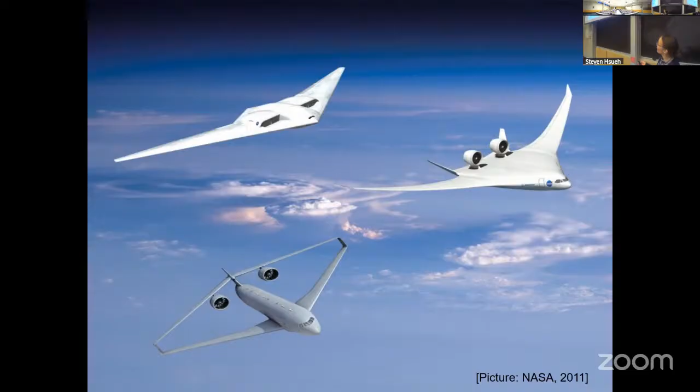And so I will start just with looking at some pictures here. And the question that I would try to answer today is, what does a truly sustainable aircraft of the future look like? And how do we make it work? Okay. So the picture that we're looking at here depicts some beautiful futuristic concepts. And what is interesting about this picture is that these are actually the airplanes that NASA has foreseen that we're going to be flying since last year.

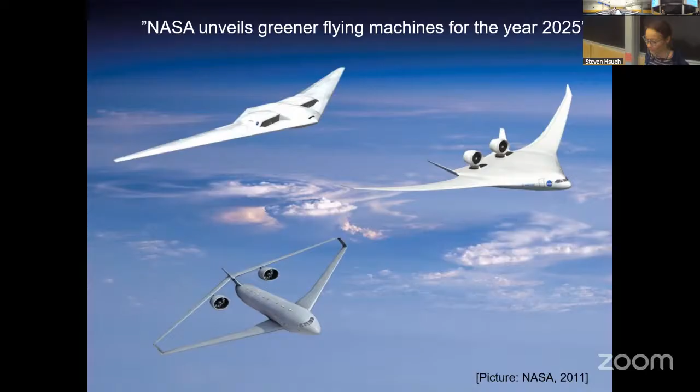So I think most of you, if you have taken the aircraft recently, it looked rather like this at the Montreal airport. So this is one of the greatest and latest airplanes that entered service a couple of years ago, designed by Bombardier initially, now called the Airbus A220, and it really looks pretty much the same. Oh? It doesn't look like this at all. So the question that I want to explore a little bit this evening is, what are the barriers to making these beautiful, very efficient concepts work, and what are the challenges we have? Okay.

So my flight plan for this talk, I always have a flight plan as every aerospace engineer. We're going to start with a little introduction talking about these challenges. And also because I think most of you are not necessarily in the field of aerospace engineering, maybe more in physics, as I suppose, I will bring you up to speed about some of the things that I work on in aerospace engineering, which are very applied physics.

And then once we have the necessary knowledge, we're going to look into two case studies that highlight some of the research advances that we worked on, and that will maybe help us to accelerate a little bit the maturation of these advanced concepts. And then at the end, I'm going to talk about what's next, what's coming up. So why do we need to rethink the aircraft that we are all flying in today? And what is the driver for that? So, slides.

Good. A lot of the drivers today are regulations regarding reducing emissions and the environmental impact of aircraft. This has been around for a long time, so people try to investigate solutions to reduce the environmental impact of aircraft, mainly emissions: pollution of the air, but also emissions in terms of noise.

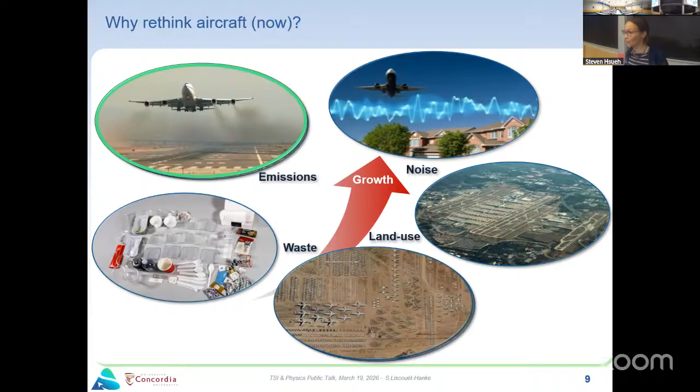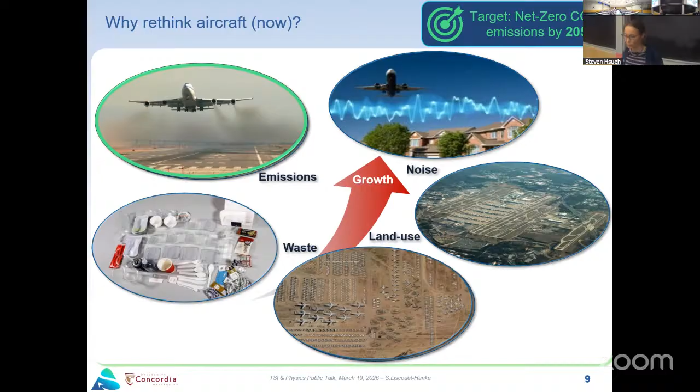But there is a renewed interest, and there are always targets to reduce the environmental impact of aircraft and aviation, and that drives a lot of the advanced design activities. Just recently, the targets have been renewed, and now we're targeting net zero CO2 emission by 2050. This is very ambitious, but that's also what makes us work and think about it every day. So what are the different aviation solutions we imagine to meet these targets?

There's a mix of things. As I already talked about, here at the top left, people think a lot about alternative fuels, sustainable aviation fuels, for example. But more recently, people talk a lot about hydrogen propulsion. This is a concept from Airbus showing an aircraft with hydrogen tanks. This is also not new. People worked on hydrogen-powered aircraft a long time ago. I think in the 70s there was even a demonstrator flying, developed by Airbus in Germany together with a Russian company. So this is not a new concept, but recently, with this pressure about reducing emissions, hydrogen is again an option on the table.

Then we have many investigations in what we call hybrid electric aircraft and aircraft with distributed propulsion. Here you see two examples on the top. This is a Canadian project with Pratt & Whitney and others looking at making a hybrid electric version of the Q400, which is a very popular Canadian airplane. And below you see a more advanced concept from a company from the Netherlands, Elysian Aircraft, with distributed propellers at the wing, all driven by electrical power.

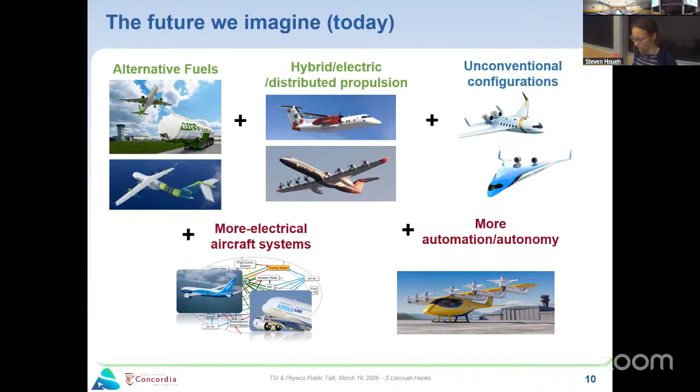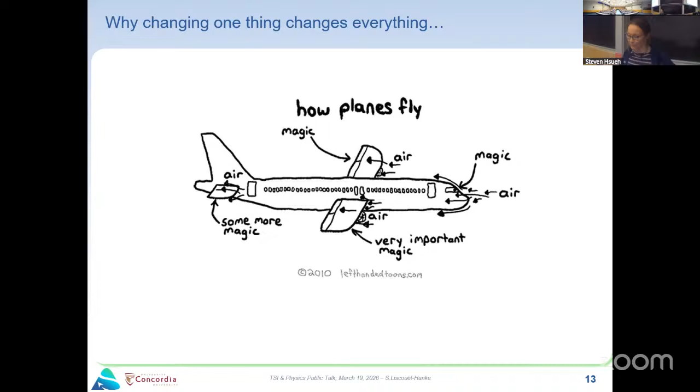But first, I just want to give you some background about why it is so complicated. As physicists, most of you know how airplanes fly. There is a lot of magic involved in what's happening with the airflow around the surfaces and so on. But for sure, what we need to consider is the force balance on our airplane. Whether it looks conventional or unconventional, we need to respect the physics.

Typically, in order to bring our airplane into the air, we need to generate lift. We generate the lift by moving the aircraft forward through the airstream by producing thrust. So if we move fast, we have more lift. And if the aerodynamics engineer worked very well, we have a very good aerodynamic shape of the aircraft, and we can generate a lot of lift.

So thrust is generated by the engines, and it's also there to overcome the resistance of the aircraft in the air, which we call the drag. And of course, our lift needs to be big enough to overcome the weight of our whole machine that carries all the necessary equipment that we need to make our aircraft fly.

So if we now want to modify the aircraft, most of these advanced concepts that you have seen at the beginning are concerned about the aerodynamic efficiency. So these beautiful concepts try to optimize the lift to drag ratio. Most of the time, we want to create more lift with the overall surface and reduce the drag. And so in this case, if you do that, you might need a little bit less thrust to fly at the same speed. Yeah, so that's the premise.

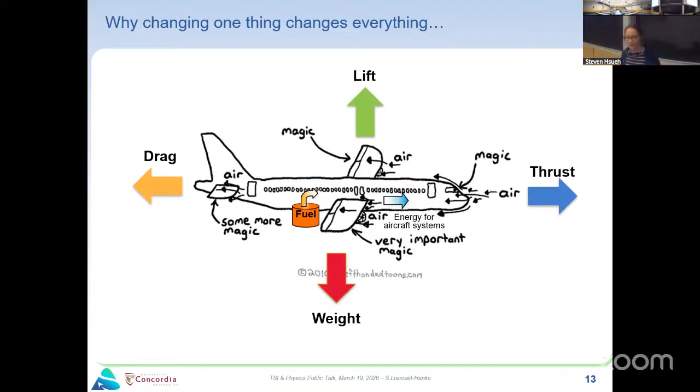Okay, so we burn fuel to propel our airplane forward. We also need some energy for all the systems inside the aircraft that we need to make work, and this is what I'm going to delve a little bit deeper into in a few minutes. And also we take some energy from the outside. So typically we need to do some cooling inside the aircraft. For example, if we have a more electric propulsion, it needs a lot of cooling. So we put some holes in our beautiful aerodynamic shape to get some cold air from the outside, and this again increases our drag. And of course, we're going to exhaust some stuff to the environment.

So just to say, what is really important when we talk about an airplane is that it's typically what we call a flying compromise. Okay, so we can improve the lift of our aircraft, but then we might, for example, end up with a very heavy structure that is very difficult to design or costs a lot. And also it could be heavier, and then we need again more thrust. So every time we need to make a change on our airplane, we need to consider all these aspects together.

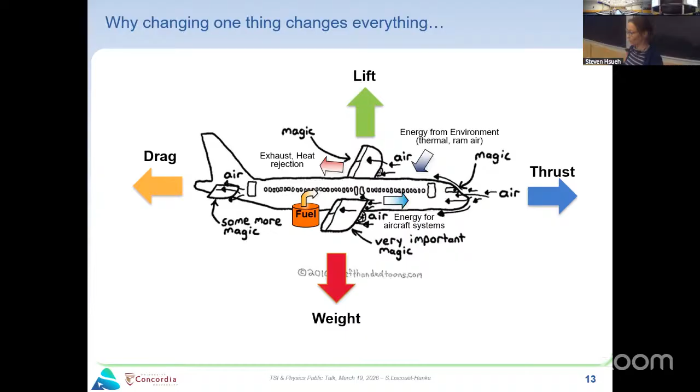Yes. And so typically when you look at these beautiful advanced concepts, they are more concerned about the aerodynamics and the propulsion systems. One of the things that is typically a little bit less investigated is everything that we need to put below the structure and the beautiful skin to make our aircraft work. And this is what I want to talk a little bit more about, because this is what typically makes the aircraft development process very lengthy and very complicated.

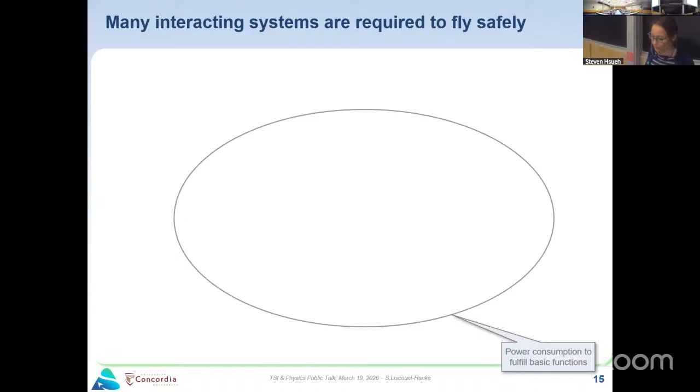So now I'm going to talk a little bit more about all these systems that we need to fly safely. And why I'm going to talk about it: because this is really important to understand, because this will make our new aircraft concept work or not work. So typically in an aircraft, we have different systems, as I said, and we can classify them in different categories. The first are the systems that fulfill the basic functions of our aircraft, and they consume some sort of power.

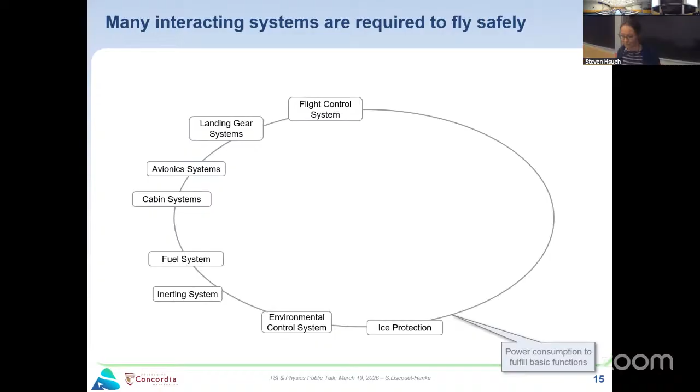So for example, the flight control system will move little surfaces on the wing to control the direction of the aircraft. We have the landing gear systems to safely land. We have the avionics, as I said, to navigate, systems in the cabin to control the environment, the temperature, the pressure, to make sure we survive when we fly up there. We have the fuel system to distribute the fuel to the engines, environmental control I talked about, and ice protection as well. So this is just a few of them that are typically in an aircraft that we use to travel around.

In order to make those work, we need different power systems. So typically we have hydraulic systems, electric systems, and pneumatic systems, and they receive power from the aircraft engine. We typically have an additional system, which is called the auxiliary power unit, which is used on the ground or in failure scenarios. And we always have our last emergency power device, the ram air turbine, that makes us land safely even if the engines fail.

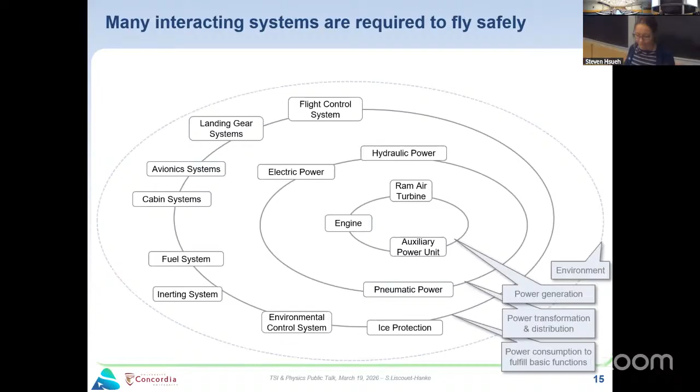So typically, just to give you an idea on how this whole works, we have the fuel system that will provide some fuel to the engines, and the engines provide thrust for our aircraft to advance, but also provide some mechanical power to drive an electric generator, hydraulic pump, and they provide some compressed air to our pneumatic system. The hydraulic system then will deliver power to actuation systems like the flight control and the landing gear, the electric system to avionics, cabin, etc., fuel pumps, and we have some systems that run on pneumatic power.

So on the ground, as I said, we're going to use the APU as well. It also uses fuel, and the APU will be used to power some systems on the ground. We also use it to start the engine. And if you want to start it, you will use electric power. So you're going to see this will become even more complicated.

We have some emergency power supply, and we typically use the air from the outside for some cooling and other functions. And this is important to consider because this is what creates the drag on our airplane. And if we need more of that, because we need to cool more because we have an electric propulsion system, then this is important not to forget.

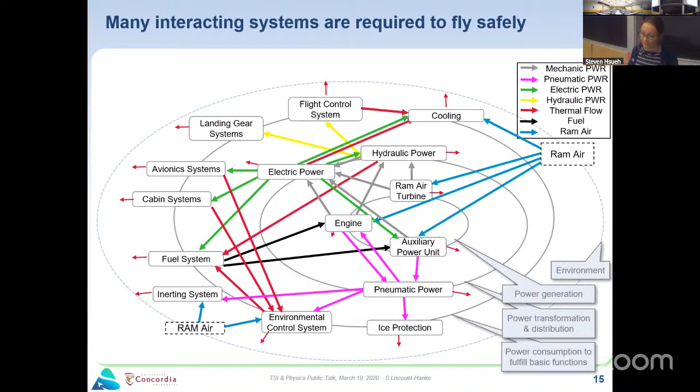So each of the systems generates some heat that goes to the environment or needs to be cooled by the systems inside the aircraft. And sometimes we have so much heat that we need a dedicated cooling system. And recently, most of these aircraft systems are getting more and more electric, so all of them use a little bit more or less of electric power. In future configurations, we might use a fuel cell as a power device, with some alternative fuel and so on.

So this is just to illustrate that there's a lot of complexity going on under the skin of the aircraft. And if the conceptual designer and the aerodynamics people come up and say, oh, we have this beautiful new concept and it looks nice, as a system engineer, my first question is, okay, how can we get all this stuff in the aircraft? How can we make it work?

You have to consider that about 30 to 40% of the volume inside the aircraft is filled with this equipment. We need it to make the aircraft work safely. We cannot just minimize it and fit it in some aerodynamic shape. So this is why it's important to have some consideration of that.

And this is also the reason why a lot of the advanced concept projects, after this initial concept phase, when you start looking into that, either they get delayed or they say, oh, we are not there yet, we go back to the drawing board, and this is when these development cycles become very long.

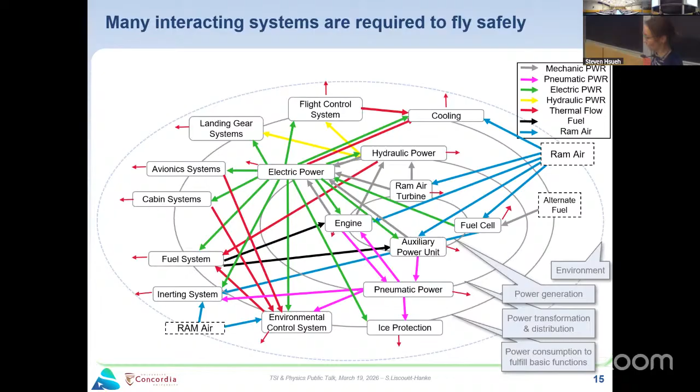All right, talking a little bit about that, and then I'm done with the introduction. How many of you know how much time it takes to develop a new aircraft from scratch? Any idea? 10 years. That's a pretty good guess. Okay, this is when everything goes well, I would say. The thing is, there's a hidden part about aircraft development, when people in secrecy look at all these advanced concepts. But typically, we have 3 major phases in the development process.

Conceptual design, this is where we develop the concept. Preliminary design, and this is where traditionally we start to look at all these complexities. And in the detailed design, we just build it, and then we hope it works in our first flight. Typically, it's a year at least until we get the certification. So that means we can say this aircraft is safe, and then afterwards we can enter into service. So this is typically a very long process.

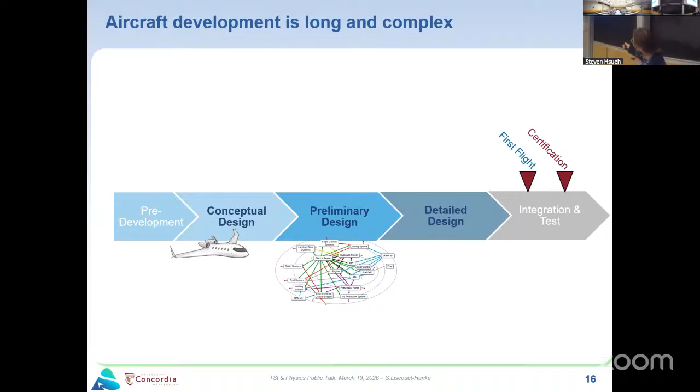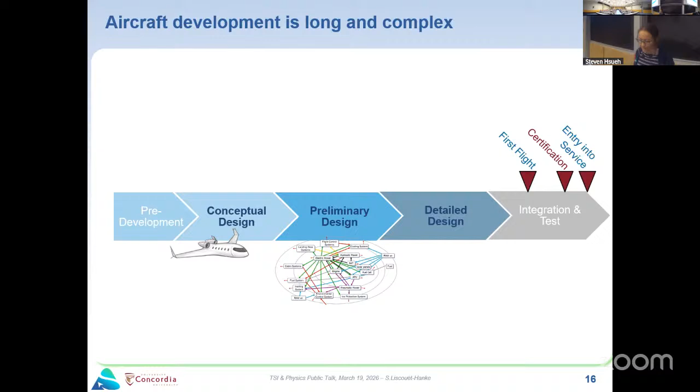And a lot of these advanced concepts, they kind of get, I would say, stalled in this transition from conceptual to the preliminary design. Somewhere in between, there is what we call the launch of the project. This is where the public will get to know about it. But sometimes you spend already many years here just ahead of time.

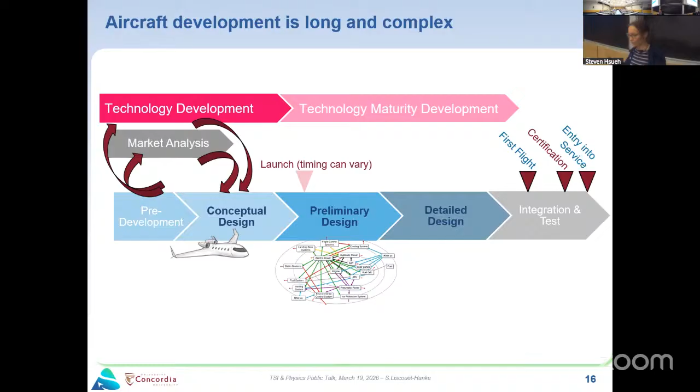So typically, in parallel to designing new airplanes, this is the game of the aircraft manufacturer. There's many different companies and universities developing technologies that we eventually can use, and their market analysis and all that need to work out together in the beginning to say, okay, this aircraft might make sense, it's worth investing a lot of money to develop it.

And so because of a lot of these very promising concepts that we have seen that promise a reduction of fuel burn of 50% or something that look very interesting, because they typically either get even heavier or unfeasible when we go into these detailed phases, this is why we try to put some of the system details in the earlier design phases.

So this is basically what we call system architecting, and this is what I'm looking at in my research program: to not be the person that says, oh, it doesn't work, but to develop tools and processes that we can use early on to develop concepts that work and that will actually make aircraft more sustainable.

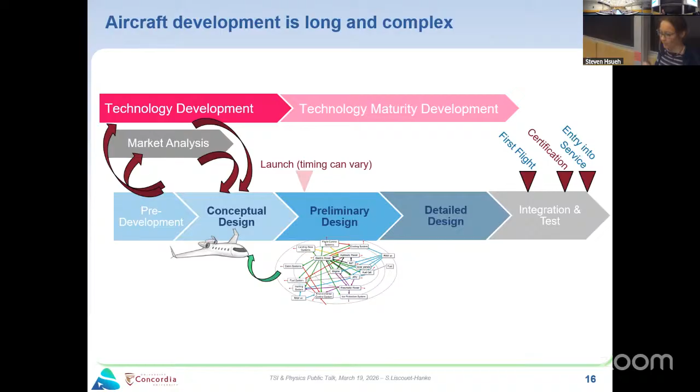So in order to do that, there's a couple of research axes. I will not go through all the details, but basically we're looking into different process improvements, developing models and tools, and also investigating some new technologies that could work together. And we do many different application studies on advanced concepts, and I'm gonna talk about this flying V concept here a little bit today, but it goes beyond airplanes, maybe even space in the future.

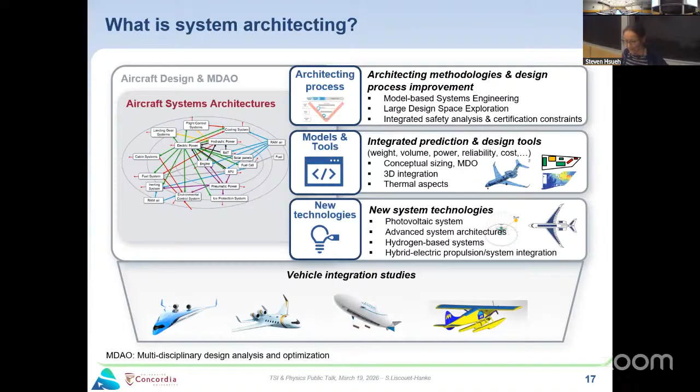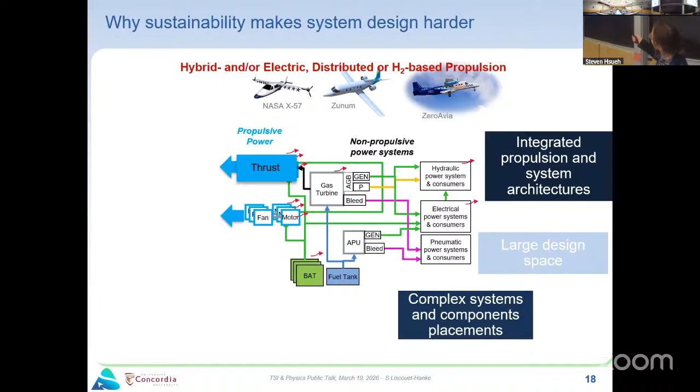Okay, so what makes the sustainable design even harder, as I said, is that there are many aspects, many things change. First of all, we're gonna have more integration between our propulsion system and our system architecture. We're gonna have many different options that we can investigate, so it's harder to choose the best solution. We're gonna have complex systems, and because the shape of the aircraft changes, it's more complicated to place them in the aircraft. We're gonna have high power, high voltage, and safety certification challenges, and more thermal management problems.

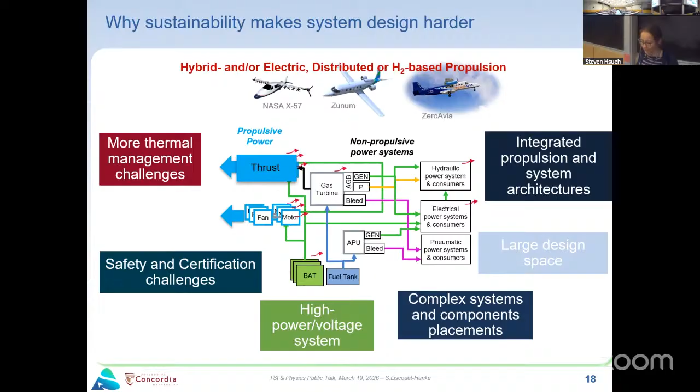So I will talk about only a few of them today, maybe the last two ones. But that was just to put you into context about the rest of the talk. So I think what we have learned so far is that these new aircraft concepts and new propulsion systems seem very promising, but they create more challenges in the system development, especially complexity and also new safety questions. And this is the first thing that I'm gonna address in the first case study that I'm gonna present.

All right, so we're gonna talk about the so-called flying V aircraft. This is a very innovative project that has been developed by the TU Delft in the Netherlands. The first concept was proposed in 2014, so it's already a couple of years. And there's a lot of different research activities going on, especially in optimizing the aerodynamics and the stability and control.

So this aircraft has many challenges, but the premise is that it can reduce the fuel burn by 20%, at least compared to a comparable aircraft, because it has a very integrated design. If you look at the inside, the cabin is integrated into the wings, so we don't really have a fuselage per se. The whole shape is aerodynamic, and it's a very efficient use of space.

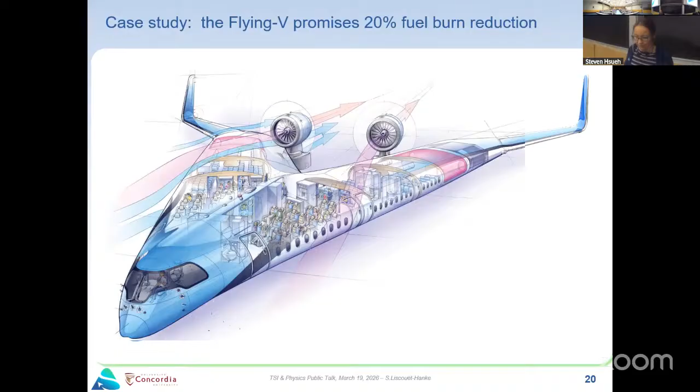So now let's have a look at the systems aspect for this aircraft. We're going to compare it to a conventional one here. This aircraft is sized in terms of performance and passengers as the Airbus A350, which is a large aircraft that you would typically use if you fly across the ocean. And the first thing we can notice is that, yes, we have a different shape of the fuselage and the wing. Overall, we use less area, which is why it's so advantageous from an aerodynamic perspective, but we also have a very different cross-section of the cabin.

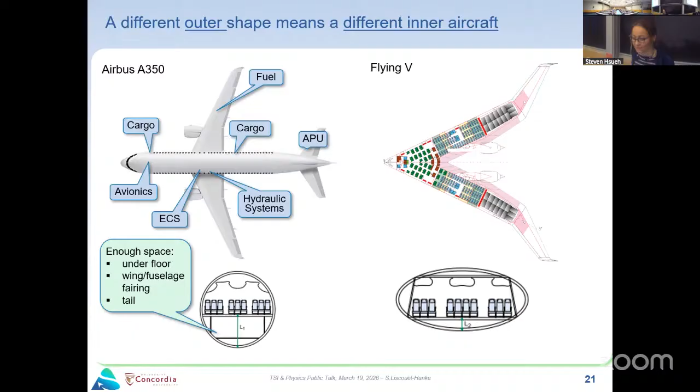Okay? So typically, we store all the fuel for the aircraft in the wings. And we have some space for cargo and avionics underfloor in the nose and aft areas. The hydraulic systems and air conditioning are typically somewhere in the zone under the floor. And we have a tail here for the APU. So typically we have enough space under the floor, in the wings, in the wing fuselage section and the tail to put everything we need.

When we looked at this airplane here, the designers had already foreseen some space for cargo here in the back. So this is good. The fuel is a little bit more difficult. You see all these pink areas are designated for the fuel, which means if you're sitting in this part of the fuselage here, there will actually be fuel on the side. So you cannot look out of the window and say hello to the neighbor sitting over there, which would be really fun. You will just be looking through a fuel tank.

There's limited space below the floor, as you can see here, very small. So no space really to locate any air inlets, air conditioning system, hydraulic bays, etc. So that's the first thing. There's not much space, so the outer shape has a big impact on the inner space. So we looked at that and see, okay, how can we find solutions to make it work?

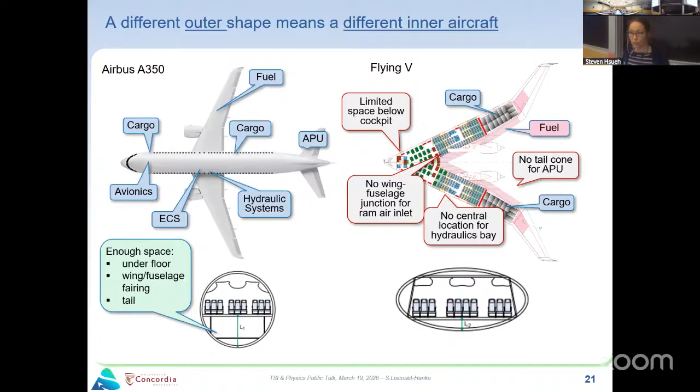There's also no tail cone for an APU. So one of the things that drives the system layout as well is the safety. So each aircraft needs to withstand a certain number of threats. And for safety, there are different analyses that are done. And typically, one of the analyses is to look at the survivability of the aircraft under the different threats.

So for example, a bird strike, lightning strike, fire, ice, and also release of fragments, for example, from the engine or from the tires that could impact the aircraft and hit some components. So these analyses, we call it particular risk analysis, guide the layout of the systems and components.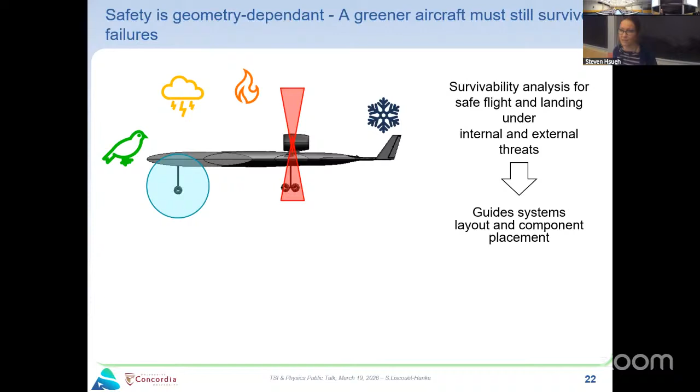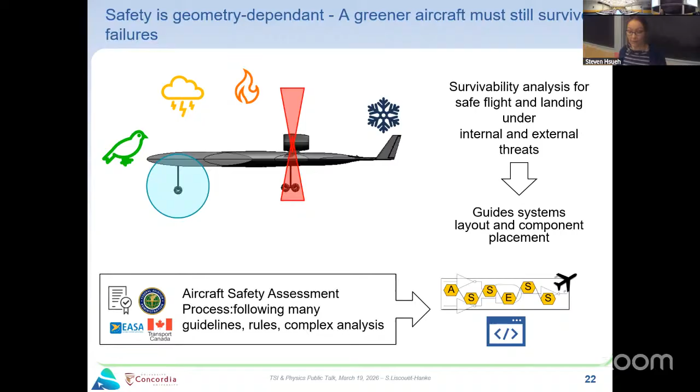And because there are so many rules and regulations, and it's difficult to do that quickly in conceptual design, we computerized all these methods in a code that can run very quickly, and we can use that in conceptual design on a very simplified aircraft shape, as you will see here, which will allow us to make a quick analysis early on. And so I will just show one aspect of that.

So one of these analyses is what we call the engine rotor failure. So a little fragment of our engine gets loose and with infinite energy will hit on a trajectory through the aircraft. The trajectories are these red cones that you see here. And you see on a conventional aircraft, you should not sit between the engines. This is the first thing, but typically from one engine to the other, there's the fuselage in between and so on. So there are some elements that will absorb some of this energy.

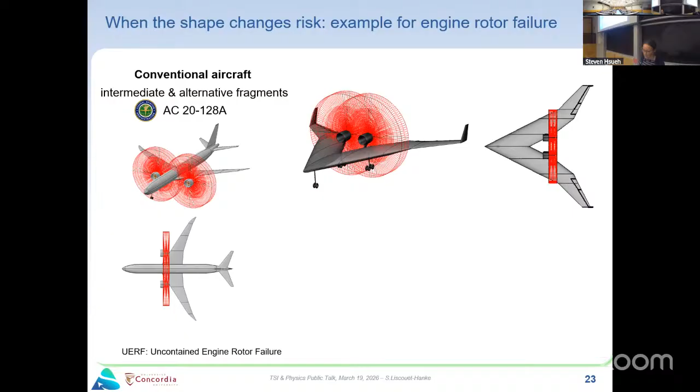If you look at our Flying V aircraft, we see already that between the engines, there's nothing in between. So typically if a blade of this engine gets loose, it will most probably hit the other engine. So both of them will fail right away if you don't put something in place, and this is not good, okay? So there are many other issues we discovered through doing these different analyses, but this is one of them.

So we can have potentially loss of thrust. We can make a hole in our cabin, so we lose the cabin pressure. And also the routing of a lot of the systems that go through these different areas, it will be difficult to separate that and so on.

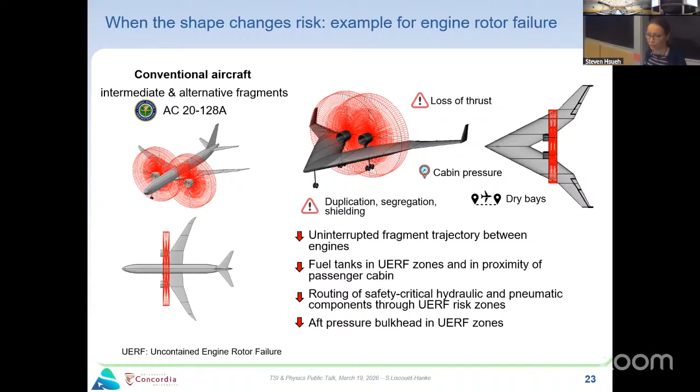So this initial analysis already showed us many challenges, and this was very interesting for the researchers on the Flying V. So they were discussing some solutions. They are not disclosed yet, but it's just very interesting that you can use this kind of very fast analysis, and you can actually combine that in the future with an aerodynamic optimization to already get a better configuration from the beginning.

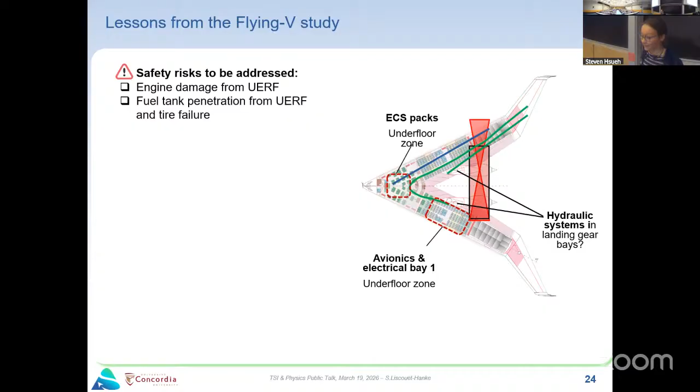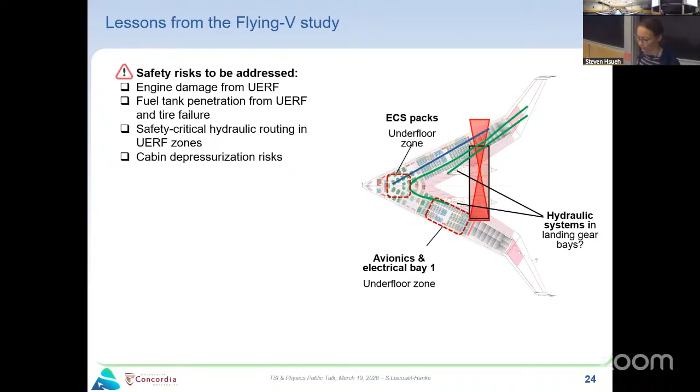So just some lessons from this study here: there are some safety risks that need to be addressed for the engines, for the fuel tank placement, for the routing of the hydraulic system, and protection for cabin depressurization. So the conclusion is our conceptual design tools help. And there's more work for the integration of the systems, the distribution of the avionics. Potentially, there's a lot of maintenance complexity that needs to be addressed, routing of systems, etc. So there's more work required.

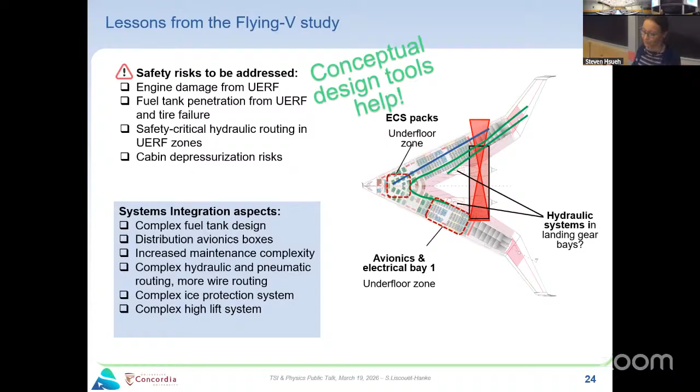But this was just an illustration of how automating all these complicated rules that are in thousands of lines of regulations, putting them into a code, enables us to use them in early design. And so we can spot some problems early on and then act on them and actually maybe develop a solution that will work in the future.

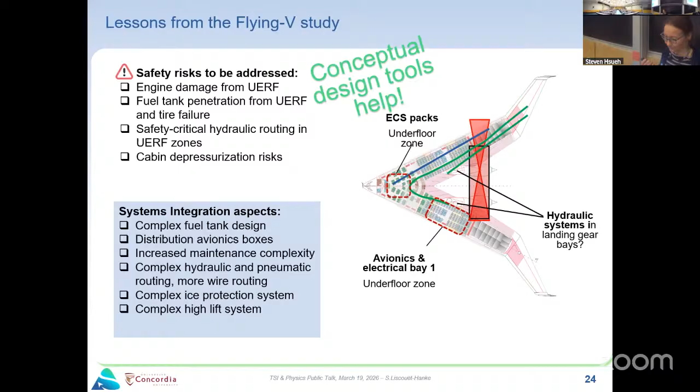All right, so now we have all these systems placed in the aircraft. Another aspect that is typically very critical early on, especially if you go to electrified aircraft, are thermal systems. So we can put all the systems in, then typically they are tightly packed, and then we're gonna have problems because they overheat. So then there's two options typically. Either we go back to our aerodynamics colleague and put some holes in our beautifully designed shape, or we try to address that earlier on by maybe finding another solution.

So the second part of the second case study I'm going to show you is that we try to address these hidden thermal challenges that we also typically find out only in the later design stages. How can we address them also earlier? Very similar to our safety assessment. So there's two things we looked at.

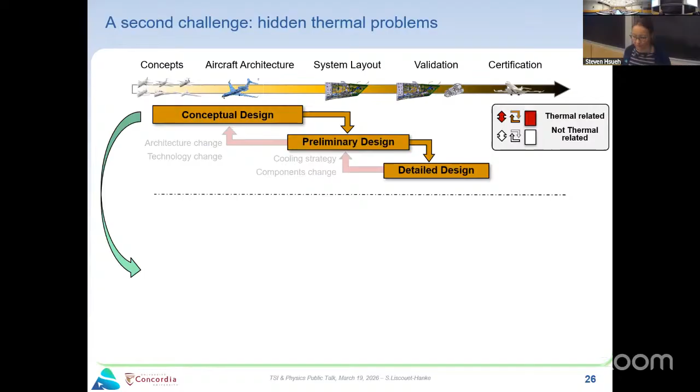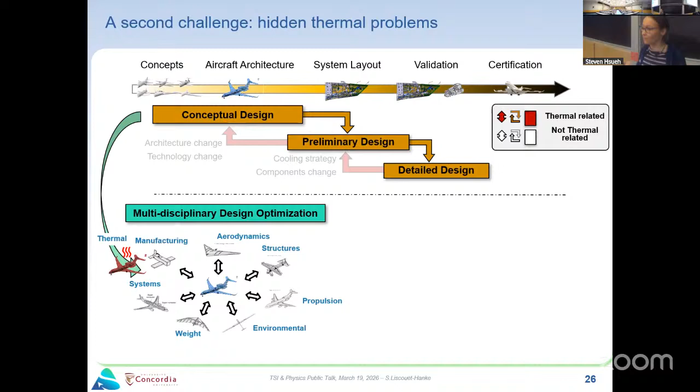First is to develop some kind of simplified geometry that we can use to run a faster thermal analysis than is typically done, which we call CFD, computational fluid dynamics. We use that a lot to analyze it, but it requires a lot of details, and so we try to simplify that. And the other thing that we tried to do was to develop an approach that doesn't need very long computation of thermal analysis, and we call it the thermal risk assessment. So this is what I'm going to talk about.

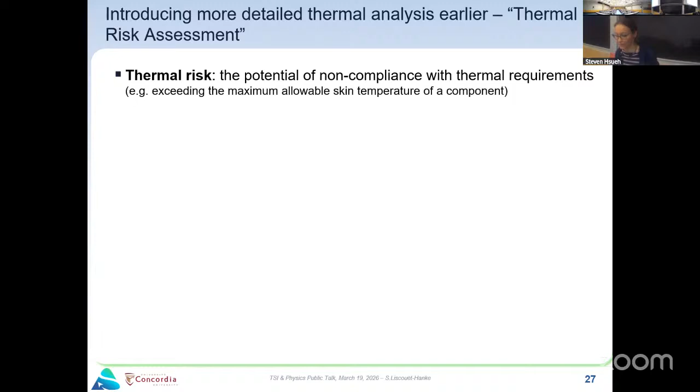So the introduction of this thermal risk assessment is basically just a quick check, very similar to the safety that I have shown, to show the potential non-compliance with thermal requirements, meaning is there something that could potentially overheat, and we want to either find a better place for it, or we need to foresee some good cooling strategy right away. How do we do that if we don't have a lot of information?

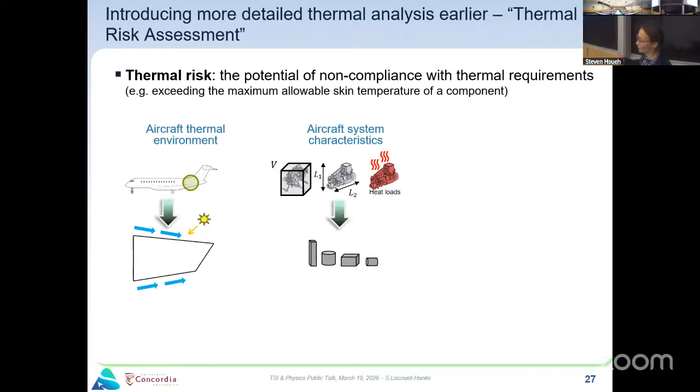We created a simplified method using basically non-dimensional relationships from thermodynamics to analyze the aircraft thermal environment. So what is the environment outside? So this is a portion of our aircraft. You can see how hot it is outside, what's the ventilation around it. We have the simplified view of all of our systems. We represent them through some shapes and add some heat loads to them.

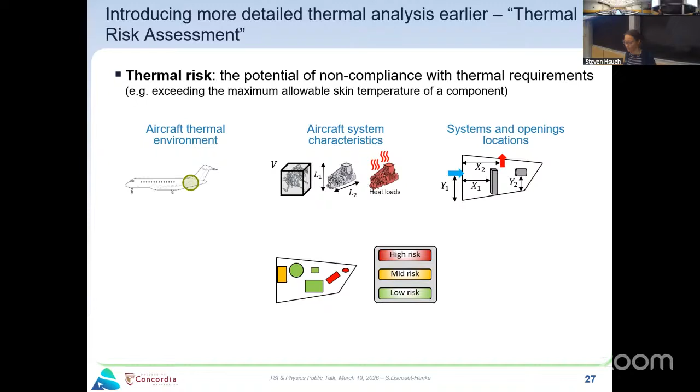And then we're going to put them in a bay with different ventilation access and some information. And we want to come up with some kind of quantification of which system has a high risk of overheating and a low risk or medium. And this, again, can inform the overall conceptual design process. I will show a little example of how that works.

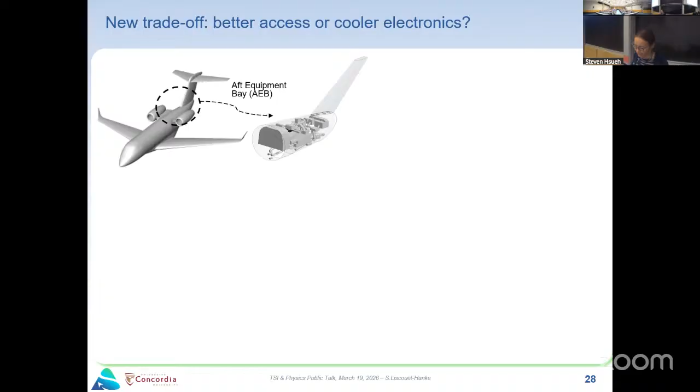So this is an example of a typical business jet aircraft. In the aft of the aircraft, we have this aft equipment bay, which is full of equipment, hydraulics, air conditioning, pumps, whatnot. And so this is a little bit how it looks in a 3D model later on, and we simplified all these components into simplified shapes. And the case study here was to investigate, for this electronic box that is there to control the engine, 3 different locations, one here, one here, one here,

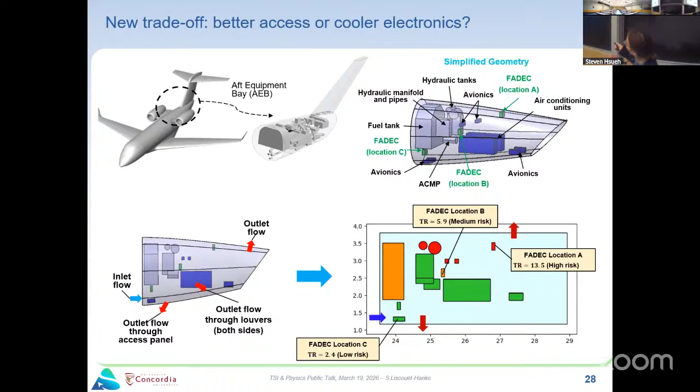and just to see what is basically the best location from a thermal perspective. So again, our little tool just considers what air goes in, what air goes out, some key parameters, and it will give us this very simplified picture of our bay, and it will give us some measures to say which component location is better.

So you're asking, what does it have to do with the aircraft of tomorrow? So as I said, most of the configurations really have a very optimized shape. So typically the systems will all be much closer to each other. Also through the safety constraints that I mentioned before, we need to put them in different locations. So analyzing safety and thermal aspects at the same time will really help us to get good solutions.

And we're actually having a research project at the moment that involves also a professor and students from McGill on what we call optimizing the system configuration for this future aircraft, where we bring together all these different tools and we let them help us to find a feasible solution.

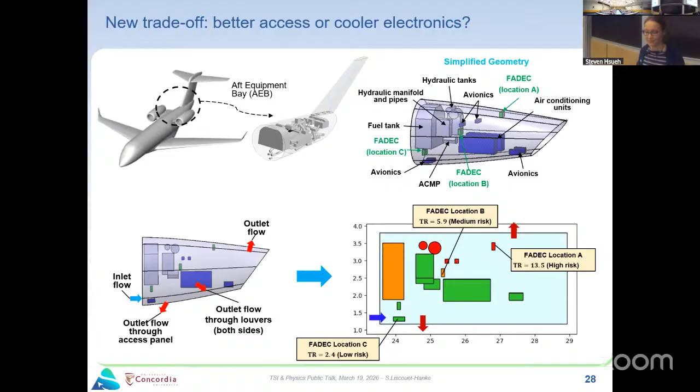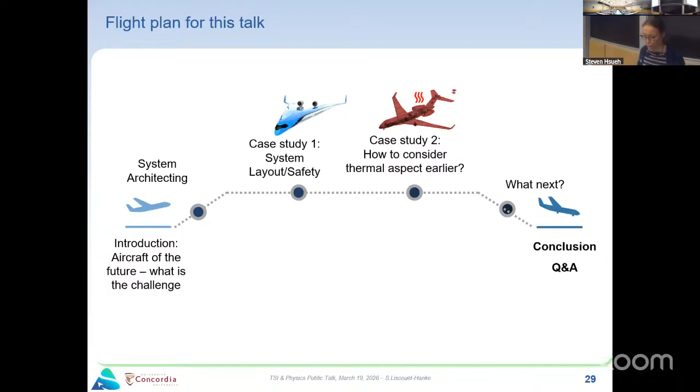Good. Checking time. Okay. So these were the 2 case studies that I wanted to show you. And now, what's next?

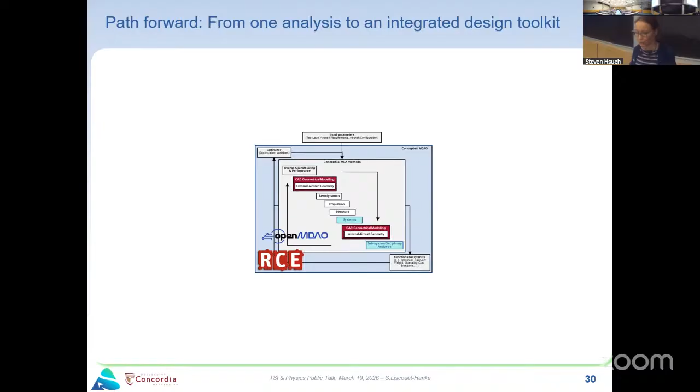So basically, as I said, we work a lot on developing tools, and they will all be integrated in this big design framework. You just see here a couple of boxes and so on. Typically we consider the overall aircraft design, propulsion, structures, but then we have these different systems here, and we integrate all these different tools. So safety, thermal aspects, wire routing, maintenance, all these different things. We try to simplify the models and integrate that into a common framework.

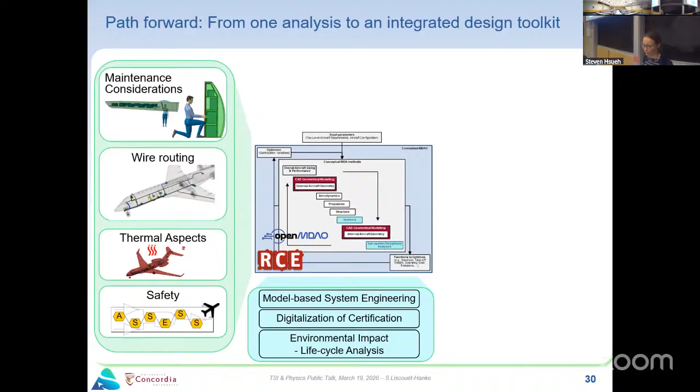So we can run quick trade studies of these unconventional configurations early on, to find some solutions and to find aircraft configurations that work and also reduce the environmental impact. In addition to making it work, there are some additional activities that we focus on in order to improve the process, which are all related to digitalization of the certification rules, and better analyzing the environmental impact by looking at the whole life cycle. So these are a few things we need to do in parallel.

But we also develop tools to investigate the technology of tomorrow that you have seen in the beginning slides. For example, at the moment, we are working on developing all the tools and estimation methods for hydrogen-based propulsion. So how to size cryogenic hydrogen storage tanks that can go into the aircraft, heat exchangers, and so on. So it's a whole new world that we want to integrate.

We work on some projects with solar energy, retrofitting the fleet of existing small airplanes that we use in Canada to fly between all our different lakes. And we also work on some concepts for advanced cockpit configurations. So these are all just different application platforms where we develop the tools, and the idea is to combine them all together so we can come up with some more feasible, promising concepts.

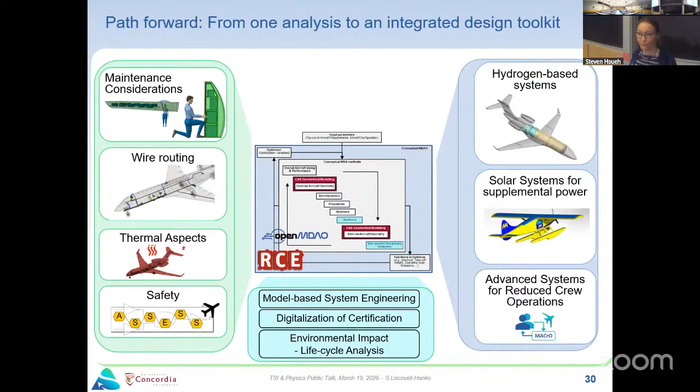And the question of today is also, going forward, how can AI help in all of these topics? So this is really what we're going to be looking at in the future. There are different aspects that could be interesting. One is that a lot of our detailed design tools take a lot of time to run and to compute. So we can use some AI tools to make them run faster and optimize our code. That is critical. We can also get a lot more data to build better models.

And we can also implement all these many design rules in some kind of a virtual guide to the aircraft designer. Okay, so these are some areas we're investigating going forward. So that is already the end of my talk.

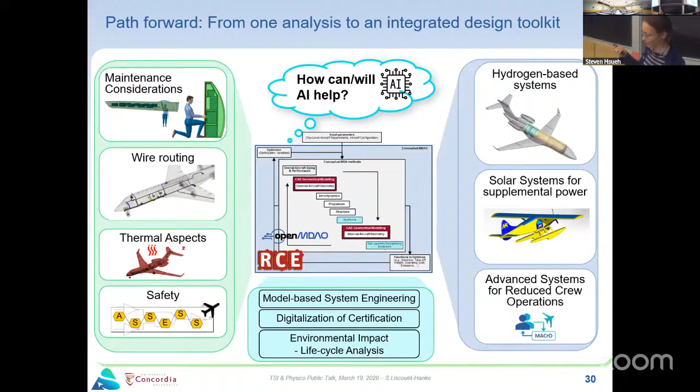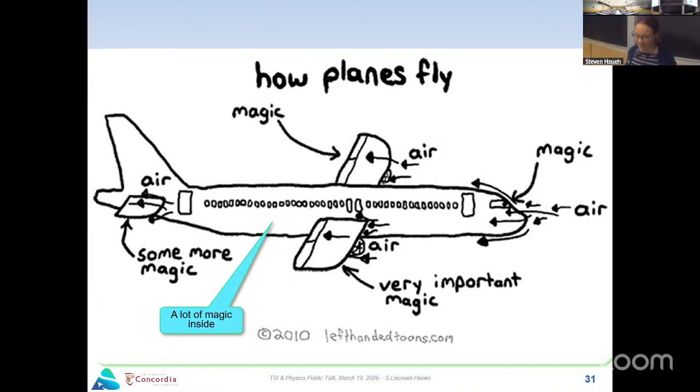I hope you learned a little bit, not how airplanes fly, I think you know this already, but that there's a lot of magic involved, and we need to do a lot of magic to develop airplanes for the future that not only look fancy, but are actually reducing the environmental impact. And in order to do that, there's a lot of magic inside the aircraft that needs to happen. I don't know what the airplane of the future will look like, but I hope it will help us to keep our skies clean.

And in the meantime, while waiting for that, we can either do a lot of work, or we can also pack our suitcase very light, not to use too much fuel when we're flying around. But yeah, it will be an exciting journey. I will be happy to answer your questions.

But just before closing, none of this is happening without a big team of collaborators and researchers. So a big shout out to my research team who helped to do all this work and produce some beautiful pictures for my slides. And also our collaborators: we have many partners in Canada and Quebec, our funding agencies, and also our international partners that work on these interesting projects. With that, I'm open to answer your questions.

Yes. For the flying V, you said that it's harder to find places to store the fuel. So do you think that plane would be used more for shorter flights, like less than 5 hours, compared to long ones? This airplane is really designed to do the longer flights, because we will be able to find enough space for the fuel. You can always scale up the aircraft a little bit. You can also just put partitions in the fuel tank. So there are different options. But typically all these options lead to some additional weight, or if you scale up the whole aircraft, again, it will be heavier and so on.